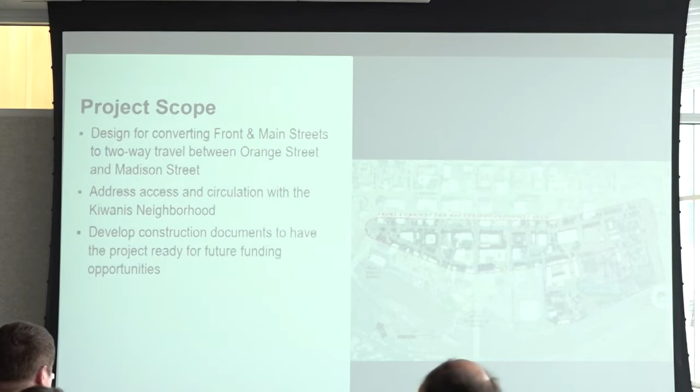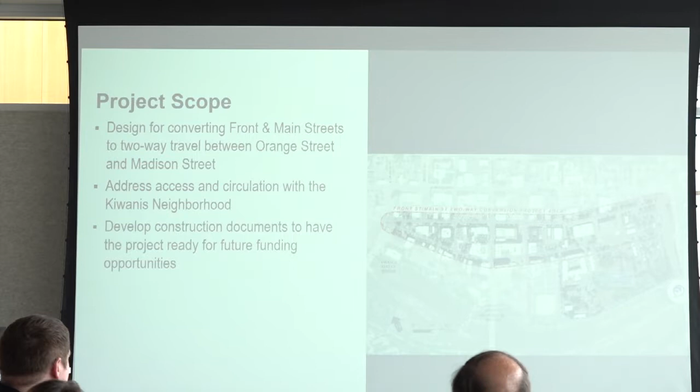Our project scope is really about designing to convert Front Street and Main Street to two-way travel. It's an existing one-way couplet system, you're very familiar with it. We're going from Orange Street intersection to Madison Street. Part of our scope is to address the Kiwanis neighborhood - when Front Street's converted to two-way travel, there's some changes that need to occur for access. I'll touch on that a little bit. And really, we're trying to develop construction documents - final design, plans, specifications, estimate, ready to go out to construction.

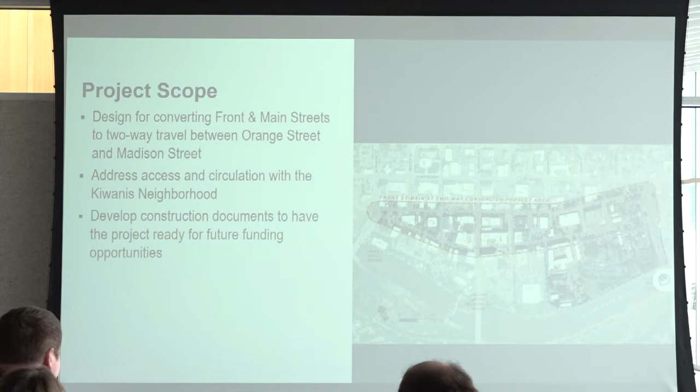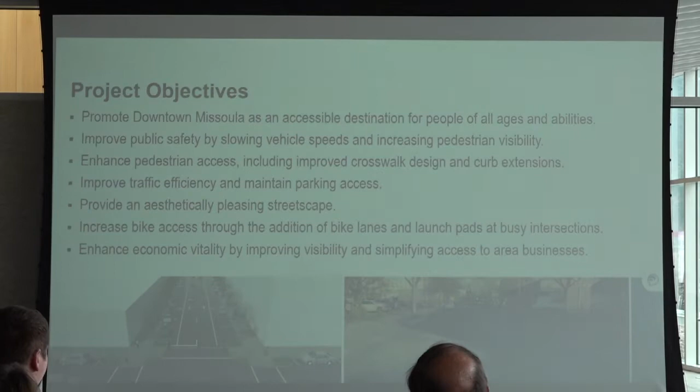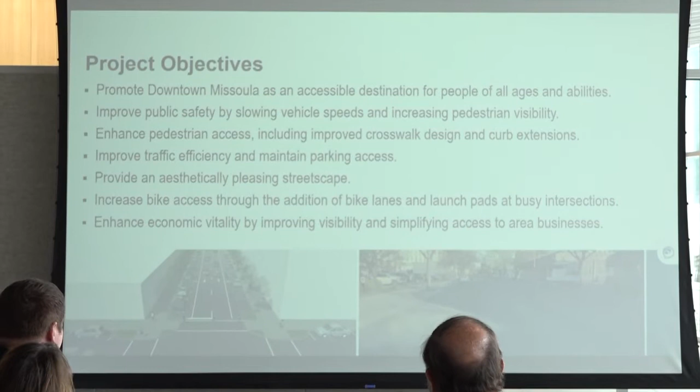So the project objectives are promoting downtown Missoula as an accessible destination for all people and ages, improving public safety, slowing vehicle speeds down in the downtown area, and increasing pedestrian visibility. Also, generally enhancing pedestrian access, improving crosswalk designs, and adding curb extensions throughout.

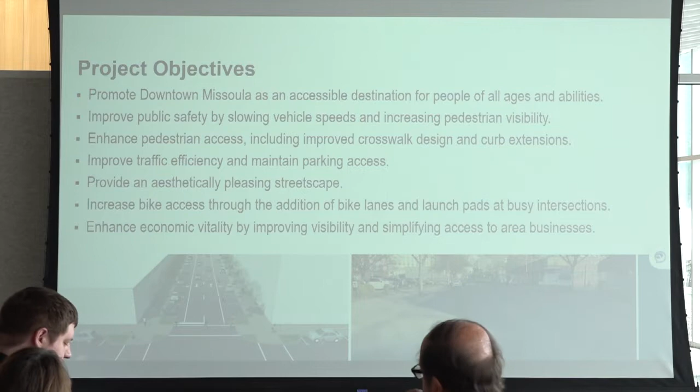We think there's some traffic efficiency by having the two-way system - you avoid some out-of-direction travel, going around blocks, like many of you did trying to get here today. There are opportunities for enhancing the streetscape at curb extensions and other areas, boulevards where there's opportunities for landscaping and additional street trees. Bike access has been a big component of the project - I'll describe that in more detail - with bike lanes and some protected bike lanes even. And ultimately, enhancing the economic vitality of downtown Missoula, complementing the amazing place that it already is.

So where are we today? We started work, I believe, in May of last year, 2021. We went out, did a number of surveys - field surveys, traffic surveys - and engaged in public outreach. I've talked to some of you before. Then we launched into our conceptual design, our 30% design, which we delivered to the city in the fall, October 2021.

Today, we're working towards the City of Missoula's Stage 3 submittal process, which is an advanced 90% preliminary design. That's currently a work in progress, and we're working through a number of open items and issues that have come about through our coordination with the city and other residents and business owners alike. We're targeting our final plans later this year. There are some nice federal grants out there that we think the project will be highly eligible for, and we'd like to help seize that opportunity.

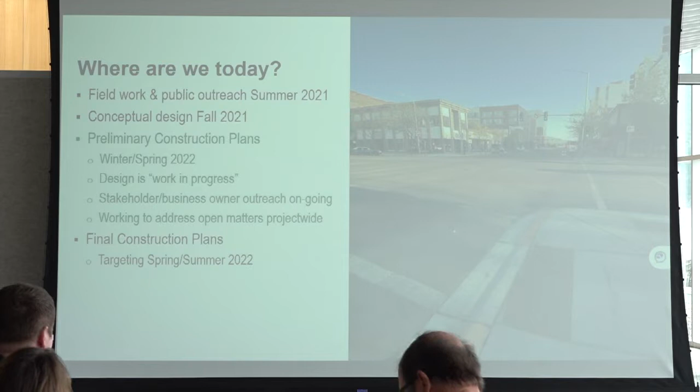So really, the post-2015 feasibility study and the 2019 Downtown Master Plan complemented many of the findings that were discussed and determined during the 2015 timeframe, and added a number of objectives and strategies for the Front and Main Street two-way conversion project that we've also adopted into the project scope. I think it's important to point out that you guys likely had a lot of say and involvement in the master plan, so we want to point out that we were being responsive to those ideas and that plan.

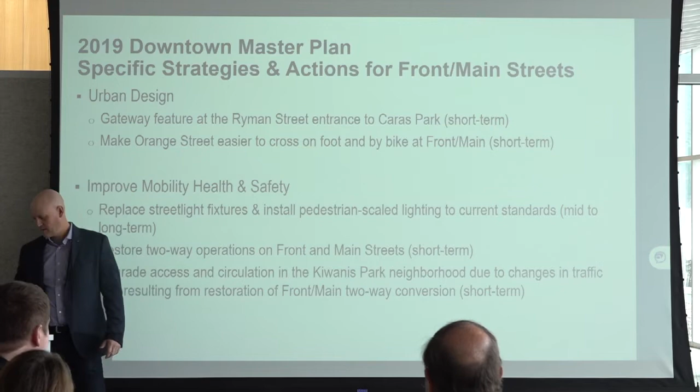That's really tied to the conversion to two-way travel. So again, we are converting Front Street and Main Street to two-way travel, and along with that we're updating intersections at Orange, Ryman, Higgins, Pattee, and Madison. Actually, we're touching just about every intersection within the footprint of the project. This includes installing modern pedestrian crosswalks, curb ramps, curb extensions, and landscaping, and adding protected bicycle facilities along Front and Main Street. That was a new item that was not specifically considered in the feasibility study.

And then along with the two-way travel, and everything we're trying to do within the street footprints, we're needing to reconfigure some on-street parking. I'll touch on that a little bit more.

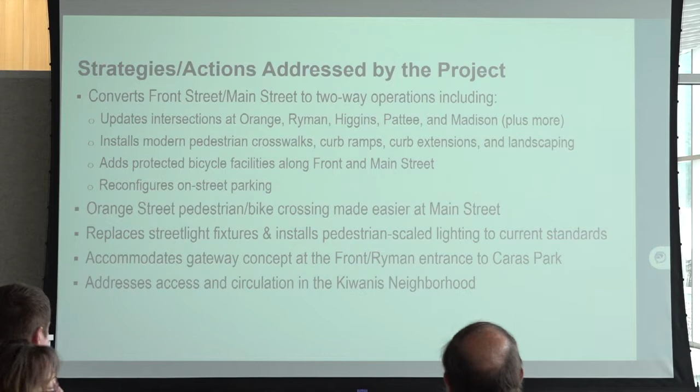At Orange Street, the pedestrian and bike crossing, we believe, is made easier with some of the elements of that new intersection design. We're replacing streetlight fixtures and installing pedestrian scale lighting, accommodating the gateway concept at Front and Ryman. And we've been working with the Caras Park, or the North Riverside Master Plan Implementation Committee, to accommodate that and address access and circulation in the Kiwanis Park neighborhood.

So let's get into it a little bit. Generally there's quite a few curb enhancements, curb extensions throughout downtown Missoula. Really what we're proposing to do is very similar to what you see up at Pine and Higgins and elsewhere, which reduces the distance for crossing for pedestrians and also improves visibility of pedestrians. So all in all, a safety improvement. And where there's accessibility opportunities to make improvements as far as ADA, that's standard practice to address those.

Street lighting throughout downtown is basically a complete revision, so areas that may not be lit or inadequately lit today will be improved. And that has also a relationship to safety, especially at intersections.

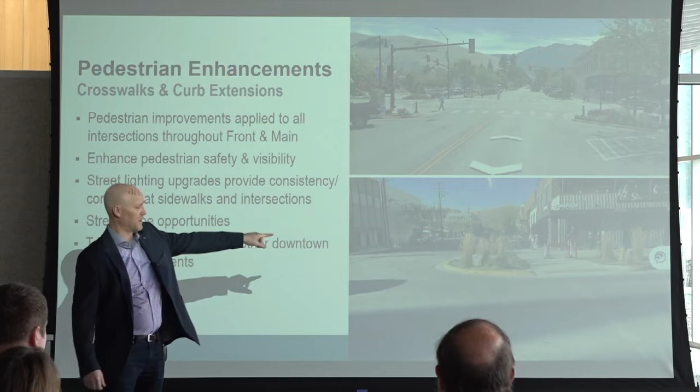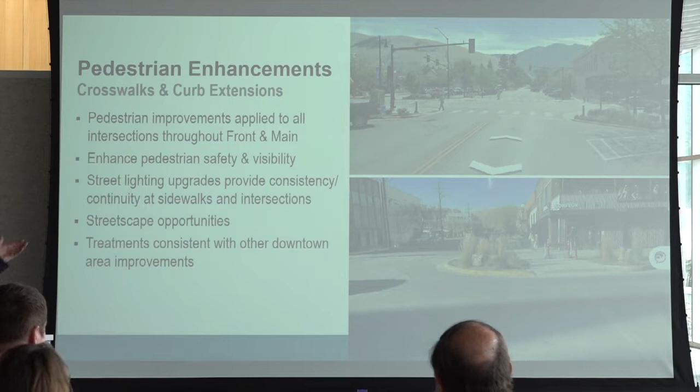There's quite a few streetscape opportunities at the curb extensions. This one happens to exist today on Main Street at Pattee, the northeast corner of the Complex Brewery. That's an example of the potential that could be implemented at multiple locations. And as I mentioned, the design and treatments being proposed are consistent with what we see throughout other areas of downtown that have been improved.

Bicycle facilities - the master plan charged us with looking at protected bike lane systems, specifically on Main Street. As we looked at that closer throughout the summer of 2021, we found that adding protected bike lanes in both directions on Main Street would really impact parking specifically. Being that that's where the concentration of parking and a lot of businesses are, especially from Woody Street over to Washington, we came up with the idea to introduce a one-way system on the bike lane.

So this rudimentary graphic shows we're proposing to run eastbound on Main Street with a protected bike lane. We connect down from Main to Front with a multi-use trail that also provides connectivity over to the riverfront trail on this side by using the crosswalk system, and then come back westbound on the north side of Front Street. They converge right here at the west end where Front meets Main, just east of the Orange intersection. This was kind of a new concept that came out of our 30% design back in the fall, and we've taken it and run full steam ahead in our current preliminary design work.

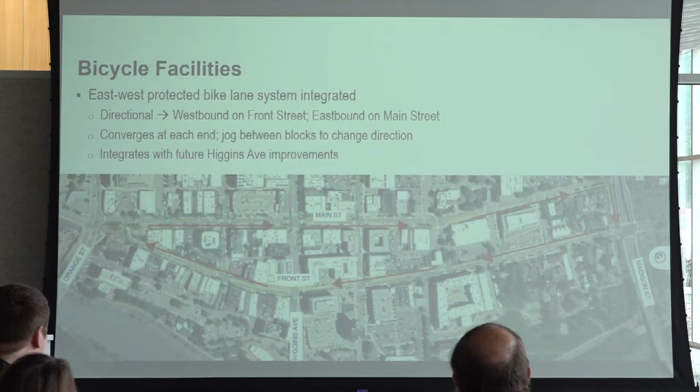One interesting thing is the connectivity with the bicycle system in general. The neat thing about keeping it on the south side of Main and the north side of Front is if you want to change directions, you have to jog a block, but you never have to cross any actual traffic or make a turn across traffic. So it's kind of a slick idea, a way to fit it in both directions.

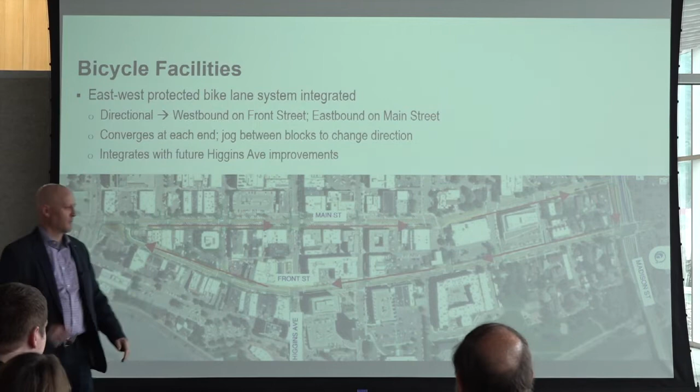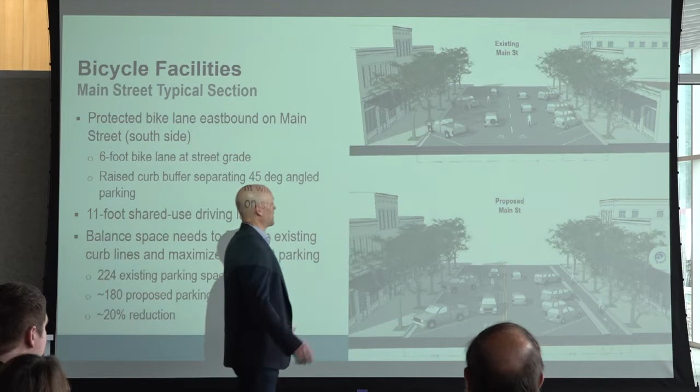On Main Street, just to give you a snapshot of these renderings: this is the existing condition on Main Street. We've got angled parking, two lanes, one direction, about 66 feet wide curb to curb. Here's the proposed condition where we've basically kept angled parking and added the protected bike lane.

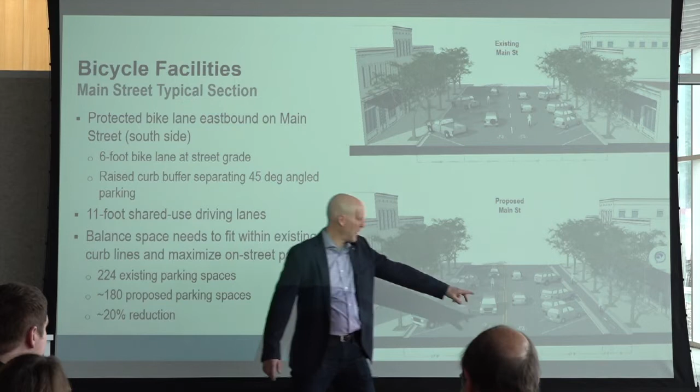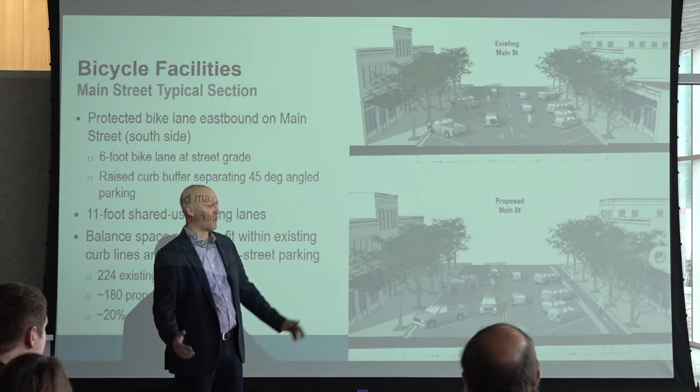This would be looking eastbound, and so we have two travel lanes, about 11 feet wide for driving, and standard parking stalls at 45-degree angle parking, which maintains a decent concentration. There's still some loss of parking spaces generally due to the change to 45-degree, but also the addition of curb extensions and other features that eat up space on the street.

I know parking has been a major concern voiced to us and raised during the feasibility study and master plan, but it's on the order of a 20% reduction of on-street parking today. So that's what we're trying to do in general: follow design guidelines while really holding the existing curbs on Main Street that are there today. We're not widening Main Street—we're trying to squeeze within the existing footprint of the road and use that space as economically as we can.

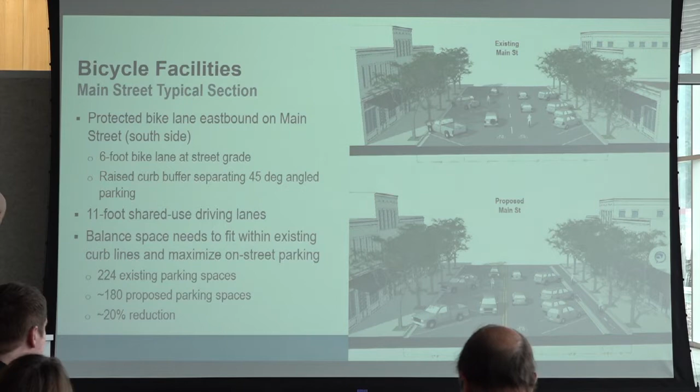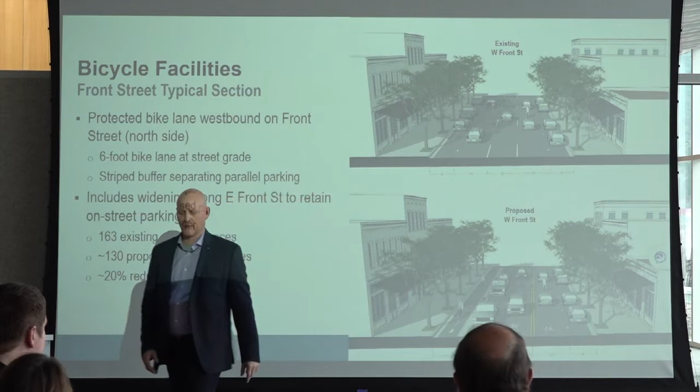On Front Street, this is a view of West Front Street looking east, and you can see this is a 3-lane section. Generally speaking, on West Front Street we have parallel parking predominantly already existing. We keep the 11-foot travel lanes and we've added a protected bike lane, again within the footprint of the existing curbs. On East Front Street, we have the narrowest section, and we're working through the best approach right now for fitting the bike lane in, balancing the need for landscaping, street trees, and boulevard with the bike lane.

It's an active coordination with parks and various departments of the city. Slightly different where we have angle parking—we're proposing on Main Street a physical raised curb that would act as a wheel stop to keep vehicles from extending into the bike lane or impeding it. Where we have parallel parking on Front Street, we generally plan to use striping. There's also, if you look around the country at cities with similar features, sometimes opportunities for planters placed within that buffer area—opportunities for streetscape, enhancing the green areas.

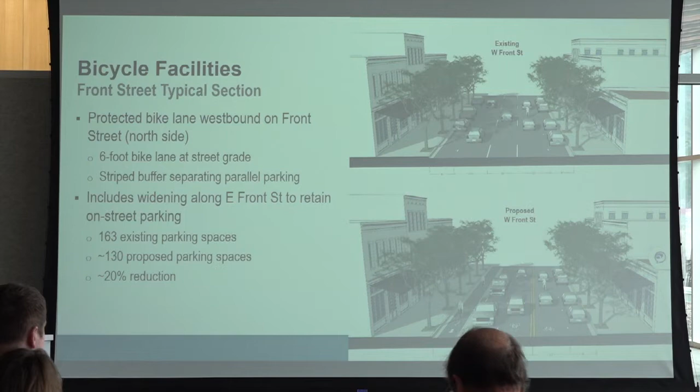Interestingly, at intersections, having a dedicated protected bike lane requires us to look at the intersection design carefully. Fortunately, there are some good guidelines out there that are very current, that help us design protected intersections. Really we're focused on safety, trying to create a consistent, highly visible, and safe condition for all users—bicycles, pedestrians, and drivers of vehicles.

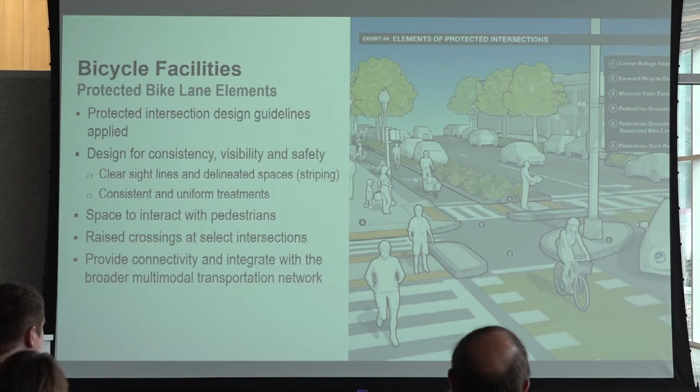So some specific intersections: at Orange Street and Main Street, let me step over here for a second. This is what was done in the feasibility study—there were a number of intersection concepts looked at, including roundabouts. When we're dealing with Orange Street, Higgins, and Madison, those are MDT-owned roads, and they also need to have throughput, and the level of service of those intersections has been a topic of discussion over the years. Part of our scope was to confirm the intersection traffic numbers and our intersection analysis, and make sure we didn't further degrade or impact the ability of those streets to move traffic.

This was the selected design. The key point here is we've maintained that concept and added some refinements to it—most notably the bicycle connectivity and a dual left turn lane, specifically the dual left turn lane from westbound Main Street to southbound Orange. We want to make sure that vehicles don't queue up in those turn lanes and block the ability to turn out from Front Street.

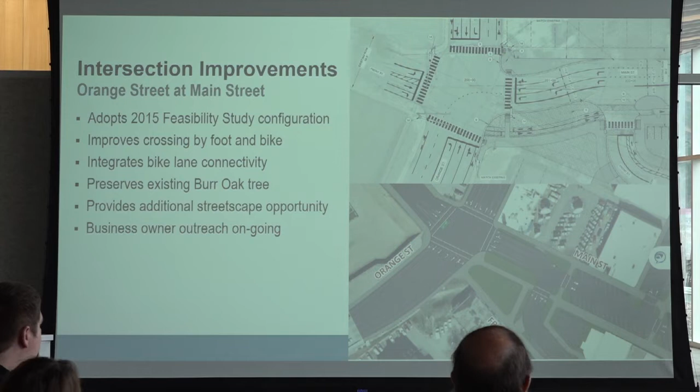The Burr oak tree I want to mention because we're keeping it. The shifted design helps us keep that tree, and also lines up the intersection a little better and uses the space more wisely.

We have a little cycle track connecting across here next to the large sidewalks that'll help get bikes and people over to Orange Street. We've particularly shortened the crosswalk from what it is today across the very long Front and Main Street stretch of the intersection, and have done what we can on the other legs.

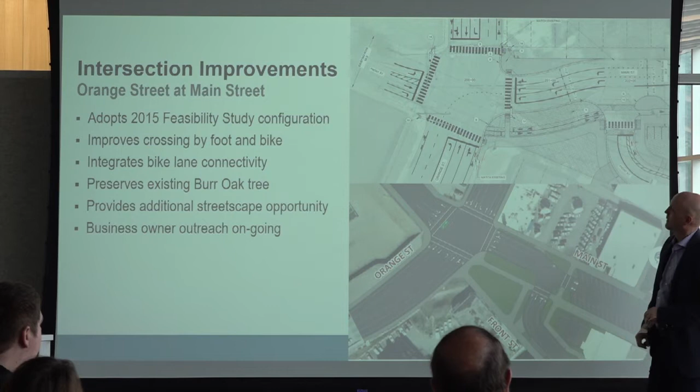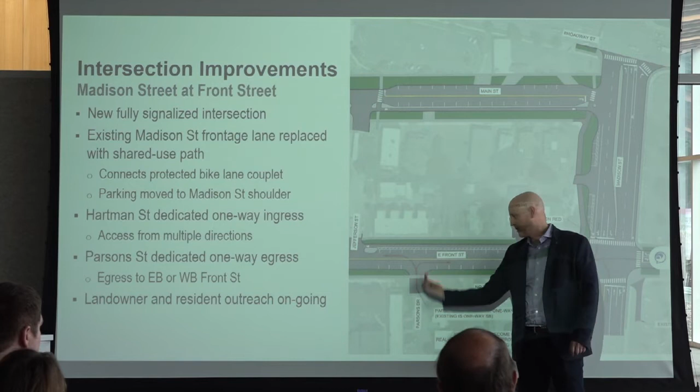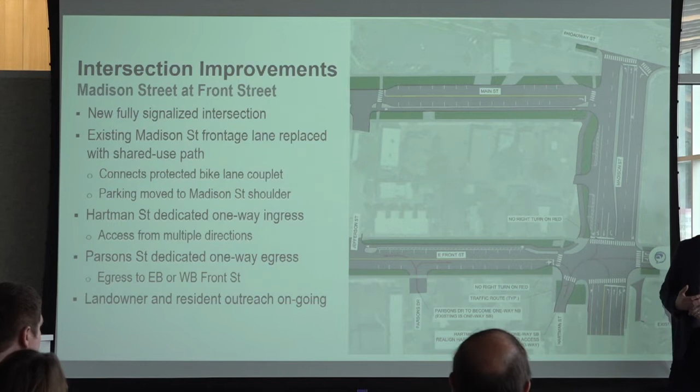We're proposing to repurpose Parsons Drive. Instead of one-way in, it's one-way out, allowing left and right turns onto Front Street. So it's a fairly straightforward proposed solution. We're still working with the city and property owners in this area on the final plans.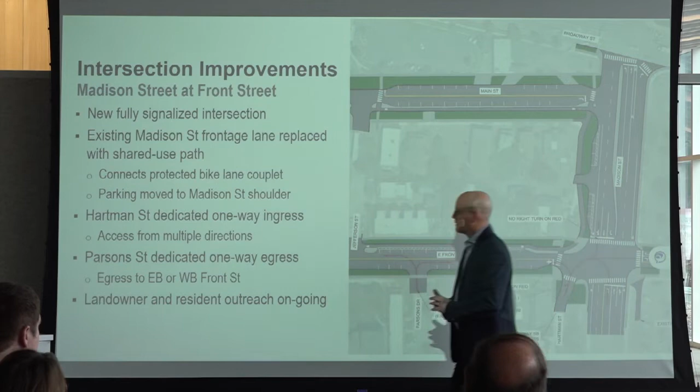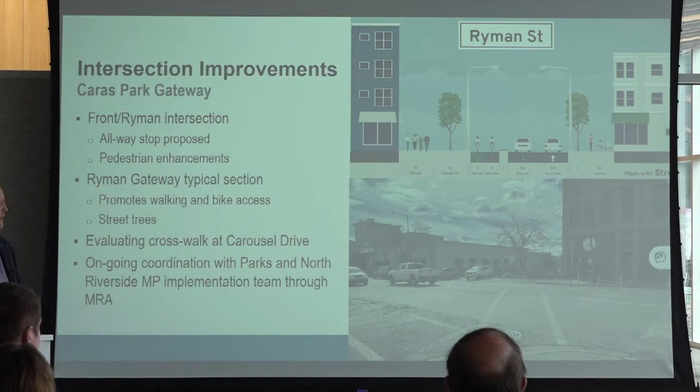At Caras Park Gateway, or the Front and Ryman intersection, you're familiar with the North Riverside Parks and Trails Master Plan, which has a nice concept for bringing people into Caras Park down Ryman Street as a gateway. We're working with the city on the gateway concept. Our improvements at this intersection will ultimately tie into how the city wants to improve that thoroughfare down into the park.

We're also proposing an all-way stop condition, since today it's a little awkward at Front and Ryman—sometimes you don't know if you should stop or not, or who's going to do what next. But our proposed solution should make that a lot more simple and a lot safer.

We're not proposing stop signs all over the place, but at Ryman Street at Front, and Ryman at Main, we are proposing four-way or all-way stops. That Front Street to Ryman stretch is also Mountain Line's proposed reroute for bus Route 1, maybe Route 12, but definitely Route 1, and on Ryman and Front there's a couple of new bus stops proposed.

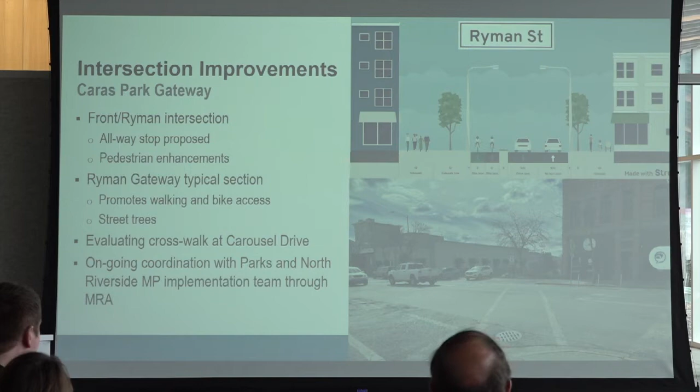Generally, we're in the middle of coordinating with the city and with multiple businesses, trying to get as much input and buy-in to the design concept so we can get this thing out the door.

That's really it. Thank you for your time, and I'm willing to take any questions.

The master plan was looking at the possibility of closing off sections of Front Street for street fairs and stuff like that. Is that still under consideration? Is that the promenade concept? I'm not sure, I haven't looked at it for a while.

Yeah, that was it. So some of the improvements the master plan envisioned around the promenade concept, our project does not preclude those from being added in the future, but it's not going to implement some of what was specifically recommended.

I think it's safe to say that if we have two-way traffic on those streets, it's a lot easier to close one of them for special events than if we have the one-way configuration. All you have to do is be downtown when we close the street down before Roots Fest, and everybody just gridlocks. Yeah, good point.

Anybody else? When construction starts on both Front and Main, will you be keeping one lane open, or will the streets be completely closed?

The bike lane width will be about 6 feet, which is a standard bike lane width. And on Main Street, you're going to have a physical raised curb about 3 feet wide, separating the angled parking from the bike lane.

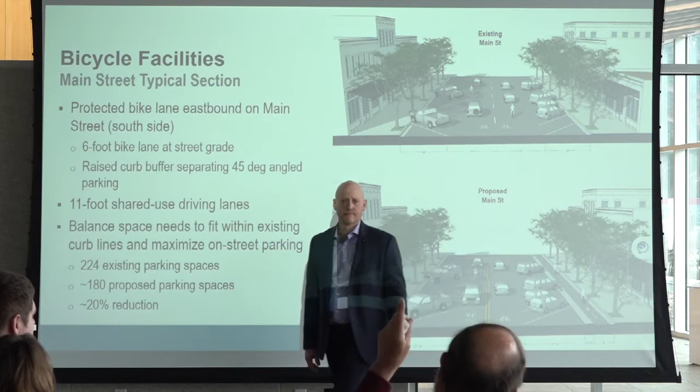On Main Street, are you taking into consideration, now that you're putting the bike lane in, the tendency of tenants with oversized long-bed trucks to park at an angle? Is that going to impede traffic? Can those be accommodated? Well, we're following the City of Missoula's standard parking stall guidelines, which are fairly long as it is. There's an impediment to traffic now with some of those guys that don't pull in all the way.

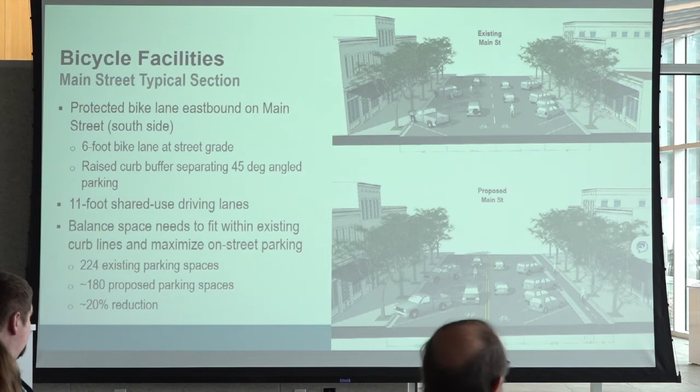Maybe with $5 a gallon diesel, maybe they'll drive their trucks less. I don't know, I hope that's not around for a long time.

Well, first of all, thank you so much for this informative speech. What you're doing is great. In the future, if we have a client who wants more information or wants to know how they can help or support you, who would they contact?

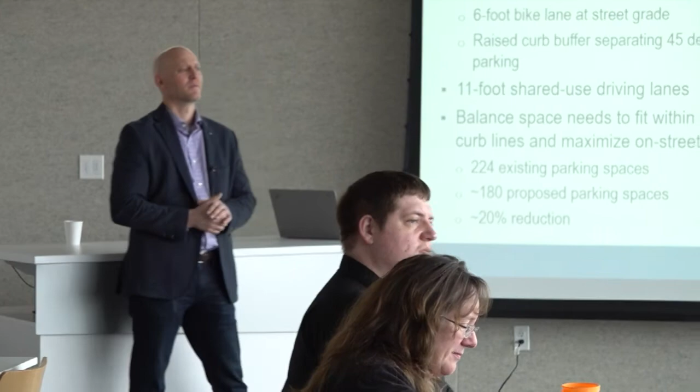Well, our public relations expert is Christine Fife with Big Sky Public Relations—she's sitting right back here. Christine, raise your hand. There's also a webpage on the Engage Missoula website with some project information. I do have business cards if you'd like to take my contact information, but I'm the best point of contact because I can direct you to where you need to go or get answers for folks.

If someone wanted to be involved with a community group doing any kind of cleanup or help, would that fall under your umbrella or someone else's? Did you say cleanup? Yeah, at the very beginning you were talking about Kiwanis Park—the restoration of that. I thought I saw something about maybe the Kiwanis group doing a cleanup, but I wasn't sure if that was part of the city or not.